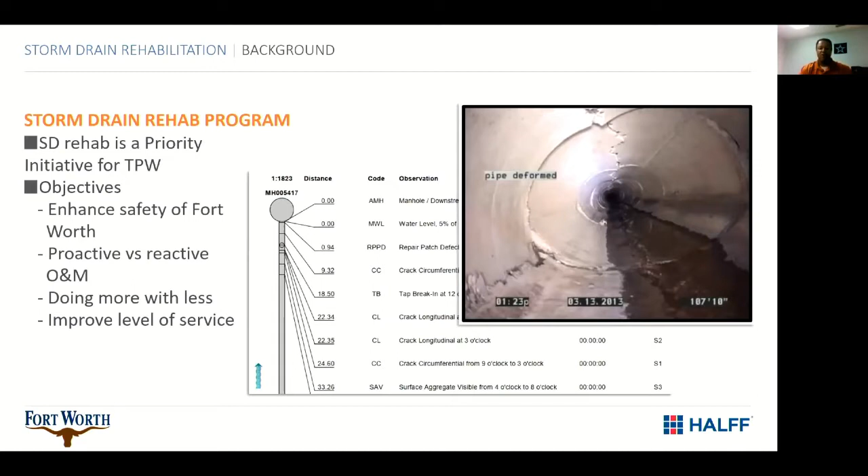A fundamental and ongoing task that is integral to the storm drain rehabilitation program has been to develop the framework. Some key considerations of the framework are the level of service and key performance indicators, which include targets for system operations, providing service during storm events of varying magnitude, repair turnaround time, and maintenance schedules and goals, as well as specific program tasks, along with manpower and staffing assignments.

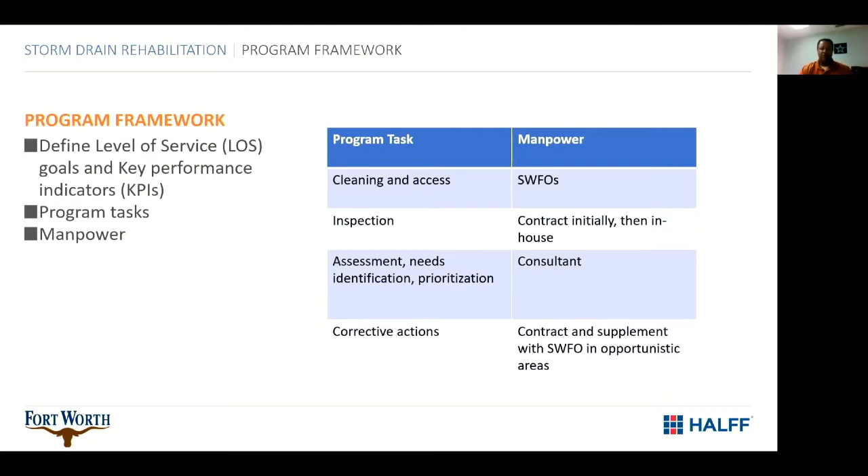So here's our framework: on the CCTV or the storm drain rehab program, our cleaning access, our stormwater field ops handles that. Inspection is currently being handled by contract, but it's soon to be transitioned to in-house. Assessments, needs that are identified, and prioritization are handled by consultants. Corrective actions are done by contract, and also by our field operations. The important first step is to address the known issues.

In our initial storm drain assessment, initial project prioritization ranked 16 known projects using basic consequence of failure criteria, which are proximity to structures, pipe size, and easement status. Easement status is an important factor for constructability, and we work with a realtor professional to perform easement research and verification.

Probability of failure refines prioritization with existing CCTV inspection data. Staff knowledge workshops discuss and document institutional knowledge about system maintenance, rehab, failure, and priority areas.

Now at this time, I would like to transition over to Matt, who will dive into what has transpired with the program.

Okay, thanks, Cannon. My name is Matt Stahl, and I'm a project manager with Halff Associates in our Fort Worth office. Over the past 22 months, Halff has partnered with Fort Worth Transportation and Public Works Department to develop and implement the storm drain rehabilitation program for proactive storm drain renewal.

So let's dig into how we are assessing storm drain condition with a standardized, repeatable method that allows us to gather high quality data to first track asset condition and second to contribute to risk prioritization.

So this is the condition assessment process that we have used during year one of the program. It starts off with the criticality and consequence of failure evaluation for that initial priority that Cannon just covered.

The next step was to prepare for CCTV. This involves some pre-CCTV inspections, securing access to storm drains where there were issues, and collecting the data associated with that. Then comes the CCTV data collection itself, along with QC and processing.

We then use the CCTV along with the consequence of failure for prioritization and evaluation of corrective actions. We then move into performing those corrective actions, which can include anything from cleaning to point repairs, rehabilitation, replacement, and even monitoring.

We then update the storm drain databases that are involved in this cycle and repeat the cycle, typically on an annual basis, to work towards that goal of proactive system maintenance and renewal.

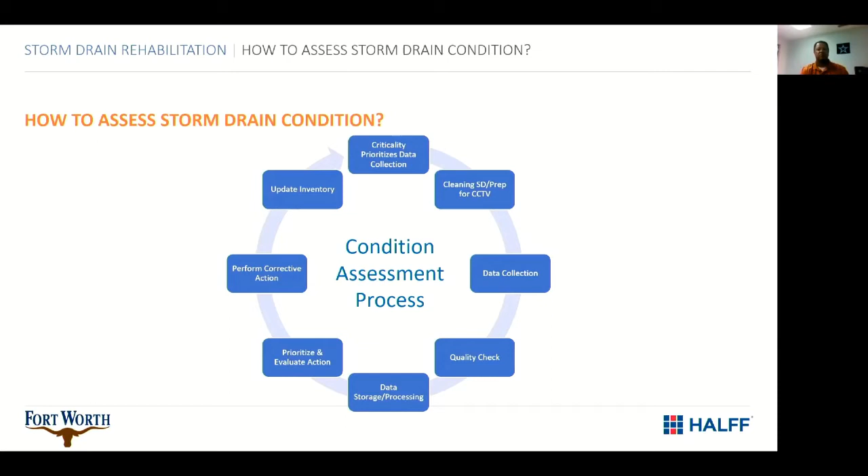So to dig into the program a little bit more in the inspection approach, for CCTV inspections of the storm drains, we're performing those on a mapshed basis to work towards that goal of proactive CCTV.

As Cannon mentioned, that is initially on a contract basis, but the city does want to implement that skill set through its field operations group to have that capability in-house.

We are conducting the inspections on a manhole-to-manhole basis as opposed to by pipe segment. However, every single storm drain in the system does end up with a condition score and a risk score.

The scoring approach itself, we're using NASSCO's PACP system. So we're keeping that pretty standard on the front end, but then post-processing takes place on the back end during QC to score only the defects that are relevant to storm drains.

As far as some big picture goals, we're aiming to inspect between 25 and 50 miles of the system per year. We want to work towards that goal of proactive and strategic inspection and maintenance management.

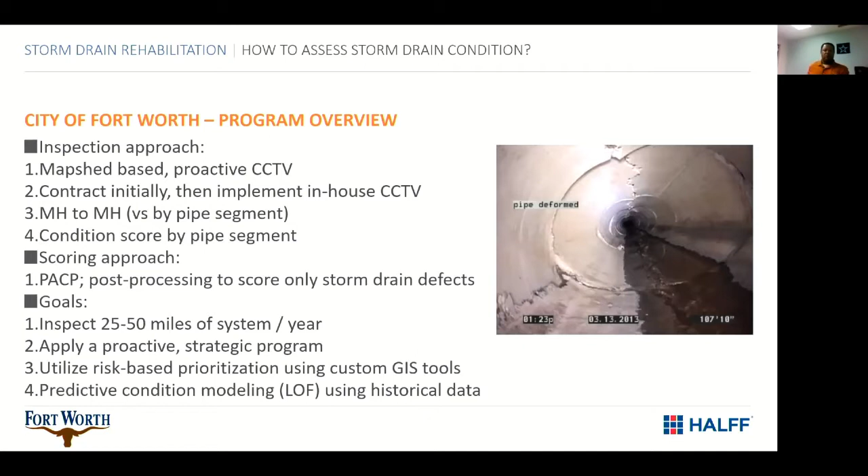We're utilizing a risk-based prioritization system and implementing that with custom GIS tools. And lastly, we're working towards being able to perform predictive condition modeling of the likelihood of failure by using historical data patterns. We'll talk more about that here in a few slides.

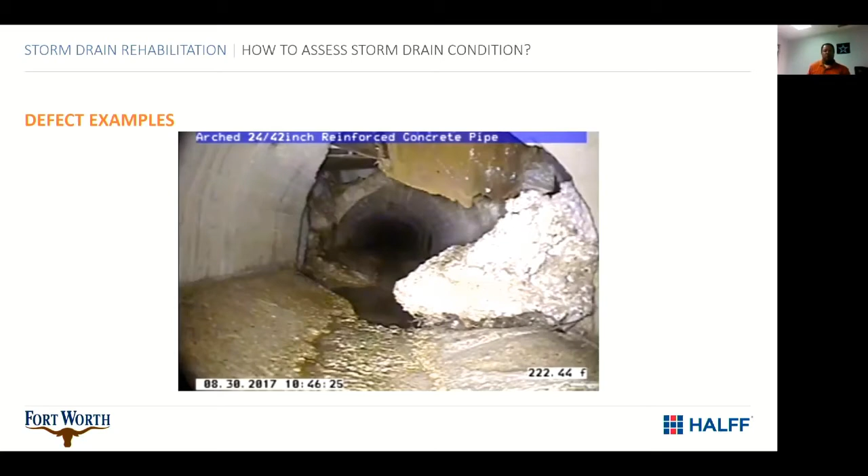Another example is this wall collapse. This is an arch pipe over in the Arlington Heights neighborhood, and a pretty severe wall collapse here. Again, a point repair would need to be performed here before one of the trenchless methods of lining or spray on or other trenchless rehab could be applied.

This example shows some pipe deformation. The degree of deformation is an important consideration when we're looking at trenchless methods. Typically, manufacturers don't recommend using the trenchless methods if there's more than about 10% deformation. And even if there's not quite that much, we really evaluate these carefully.

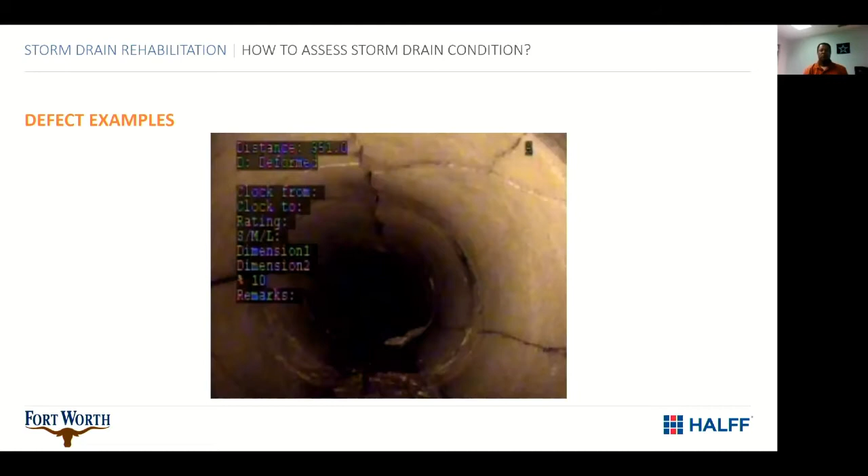This is another consideration, something we're looking at. Another offset joint seen here. This example shows some of the loss of embedment that was a likely contributor to this joint failure.

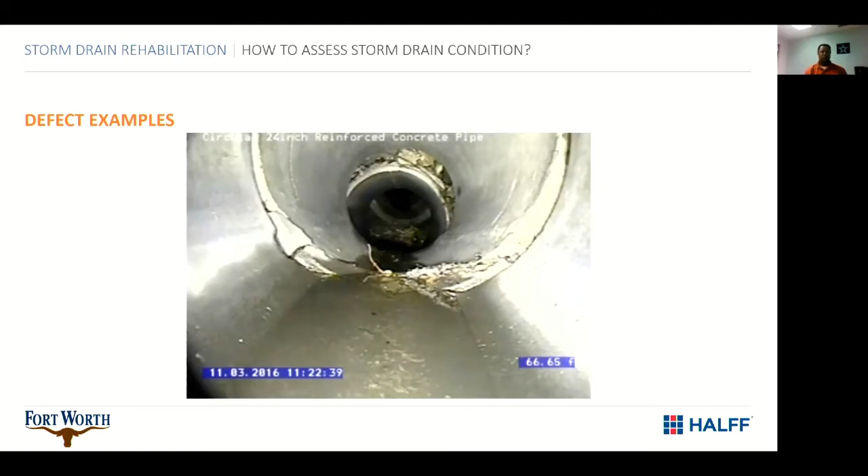And last example, more on the O&M side, we see a blockage here that would need to be cleared and cleaned to enable the proper functioning of the system.

As far as our scoring approach, the city is looking to build in this skill set, being able to perform its own CCTV inspections. For that, they're looking to purchase equipment appropriate for storm drains, things like high clearance crawlers, cables that have armoring, just for all the crazy things you can find out in the storm drains.

The scoring system itself is PACP based. Using that, we've developed a standardized pipe condition score that's applied to every pipe that gets inspected. With that score, we're using the NASSCO algorithm to convert from the condition score to likelihood of failure, following that approved method and converting the actual condition score to a 10 scale so that it's compatible with the risk-based scoring the city is using.

Just to show you a few of the deliverables we're providing for capital projects. On the left, we have a summary of site defects. This is a nice snapshot on one page of defects, considerations, any risks observed at the site, as well as rehabilitation method recommendations - the methods appropriate for each site, as well as those that might not be appropriate for different reasons. There's also a planning level cost estimate provided there.

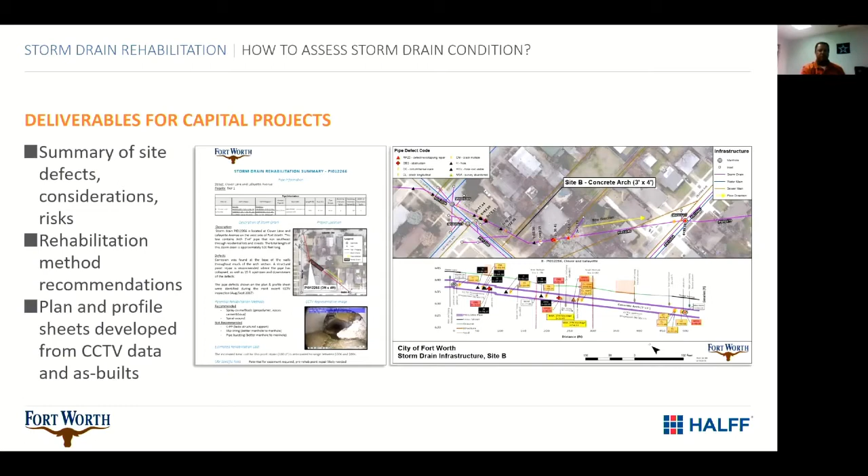Another data deliverable we're preparing is shown here - this is a web map service. Basically what we're doing is leveraging the Stormwater Development Services viewer, an existing viewer already in use by Transportation and Public Works for drainage reviews and other purposes. So we're using that and we're able to add to that existing service map services.

These allow us to provide data in an up-to-date format with secure data access. Most of these layers range from CCTV to pipe recommendations, corrective actions, different inspection routes - a whole variety of data products. Most of those are read-only, for reference, for evaluating the projects going forward.

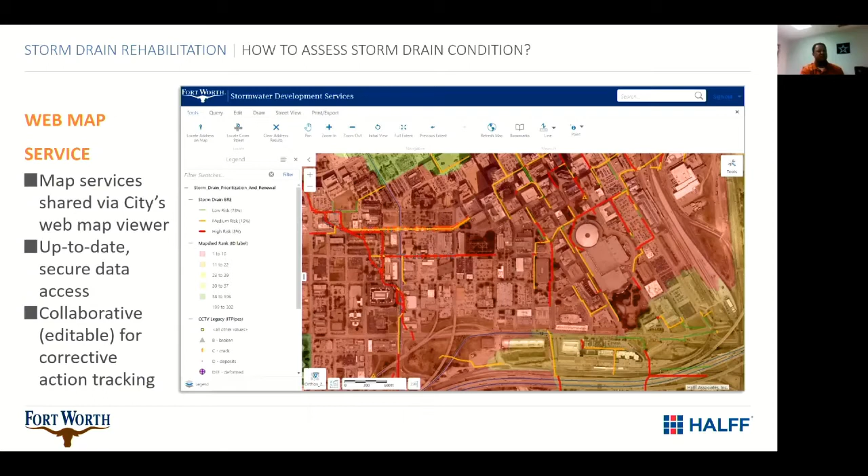But right at this time, we're actually implementing a collaborative layer, which is the recommendations for corrective action. We're really excited about this - it's going to allow us to improve the collaboration between the city groups participating in building the storm drain rehabilitation program.

So our next task is to prioritize the storm drains for rehab, replacement, monitoring. Let's talk about how the city of Fort Worth is doing this.

Within an established program framework, a business risk exposure approach allows us to combine the condition scores we're collecting through CCTV along with consequence of failure scoring to prioritize storm drains for corrective action. The city's software framework includes ITpipes, Excella as the work order system, and the Esri suite of products, along with some customized ArcGIS toolboxes.

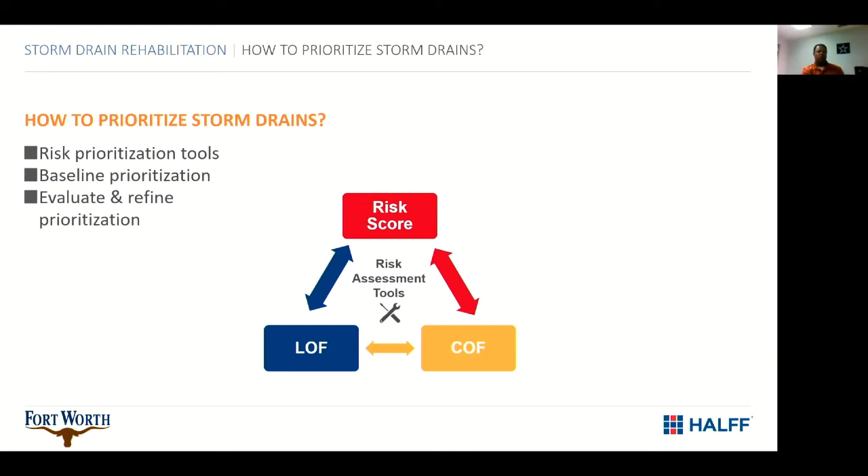So basically what that process looks like as we apply the risk criteria: the first step is to use the surrogate probability of failure information, so for pipes that have not been inspected, to make an estimate of that probability or likelihood of failure. We evaluate those results, performing things like the correlation analysis shown here on the slide, just to make sure those criteria are being applied as intended and that those results make sense.

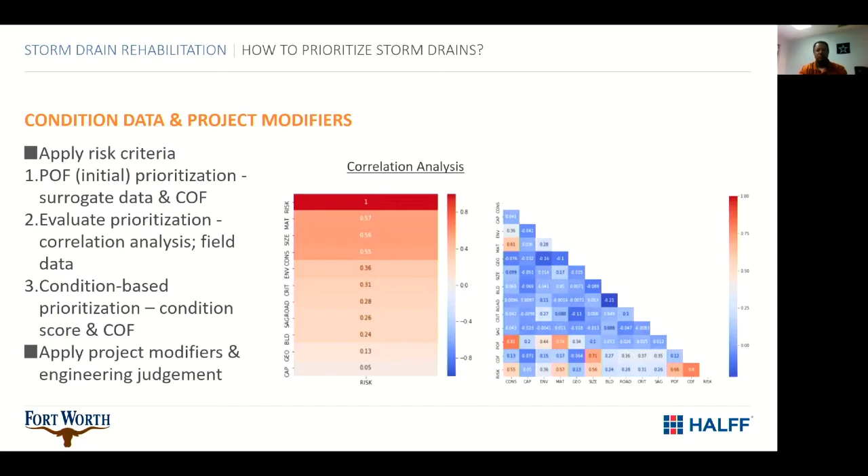The second prioritization is using the condition information, so using that CCTV and the standardized scoring, we take the results from that prioritization, apply different project modifiers and engineering judgment to come out with the final prioritization.

I'd like to perform a quick demonstration here to show you what this GIS-based prioritization looks like in action. It's a nice little tool that really lets us quickly evaluate and reprioritize storm drains as needed.

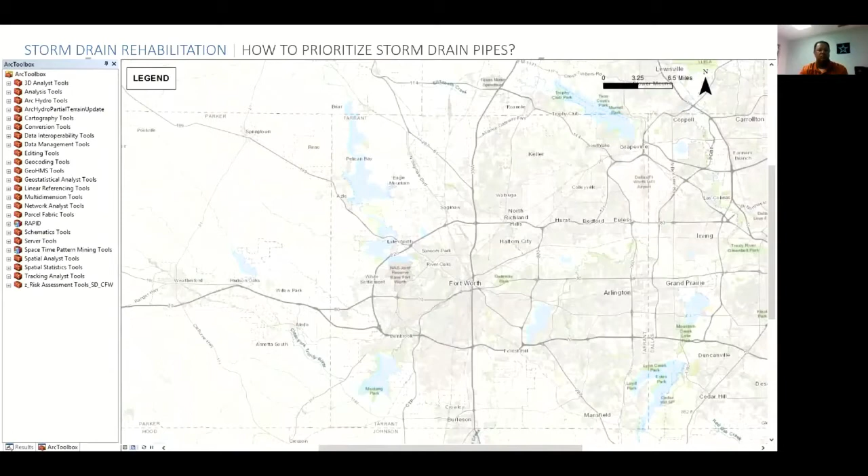So here we are in the GIS environment. We see the storm drains there in blue showing up on the map. Over on the left, we have the ARC toolbox, and at the bottom you can see the custom ArcGIS toolbox that's added to this project. This lets us look at the probability and consequence of failure as well as the risk score and rank.

You see there's basically a tool for each of the risk criteria that we saw on the table a couple slides back. We're going to apply those risk criteria to everything we know about the system, all the attributes that are shown here for the storm drains.

You can see that we have added some standardized fields, one for each of those risk criteria. Those are going to roll together over here at the probability and consequence of failure and allow us to establish those along with the risk score and rank.

We'll look at one example here today: this is the capacity score. This tool gives us access to all the layers that we have in ArcGIS, and basically what we're doing here is taking a pre-established capacity grade that compares the capacity of the pipe with the runoff to that pipe.

So the tool is running here, and it's very quickly going through, evaluating all of these 51,000 pipes that we have in the data set. We've scored for this particular criteria, the capacity score, where the pipes with an F get that higher score, and pipes with an A get a lower score.

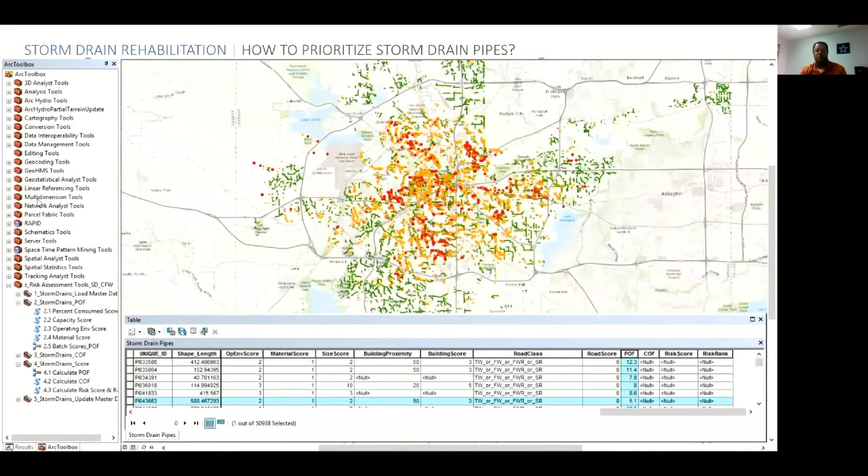So we'll pull that up just to show you the weights that are completely editable, that can be refined and changed as needed, and those all of course add up to 100%. So this is very much a transparent process - it's not a black box. We like it because we can really see what's driving the results based on the data.

So here we see those results in the map view, with red being the highest risk for probability of failure. You can zoom in and look at any of the data that's driving this and producing our scores.

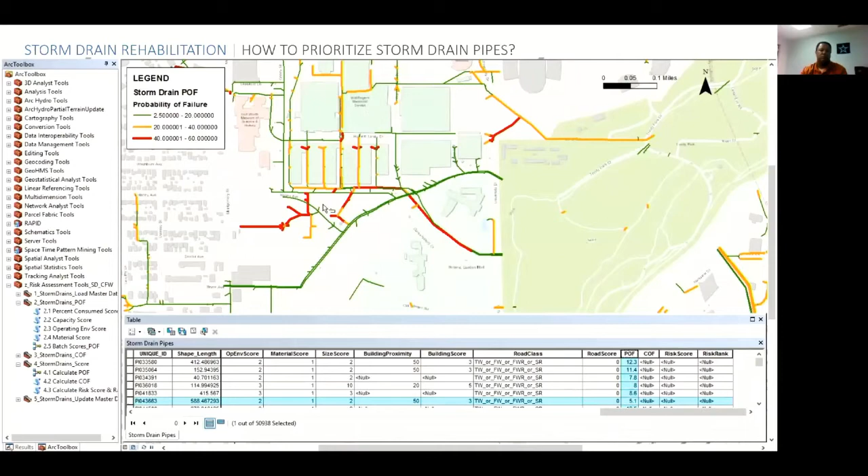To move on, the last task in our cycle here is to select and implement the appropriate corrective action. As part of the storm drain rehabilitation program, we like to prepare two types of deliverables.

First are these near-term deliverables that have more actionable near-term information. Typically these would be on a 10-year type planning cycle, such as the first table at the top, which is a 10-year condition assessment schedule. Now this is based on our risk results, and it's organized by Mapsco. This is the way that for the City of Fort Worth, we're conducting these inspections and proceeding through the system.

Another example of a near-term planning tool is this utility conflict prioritization table. We're seeing lots more of these utility conflicts these days, so it's important to keep track of them.

The second type of deliverable are these longer-term deliverables. We like to prepare tools such as this 50-year look at rehabilitation costs. We find this is helpful for the city to be able to aid budget projections and to more effectively communicate the needs of the program to stakeholders and to city council.

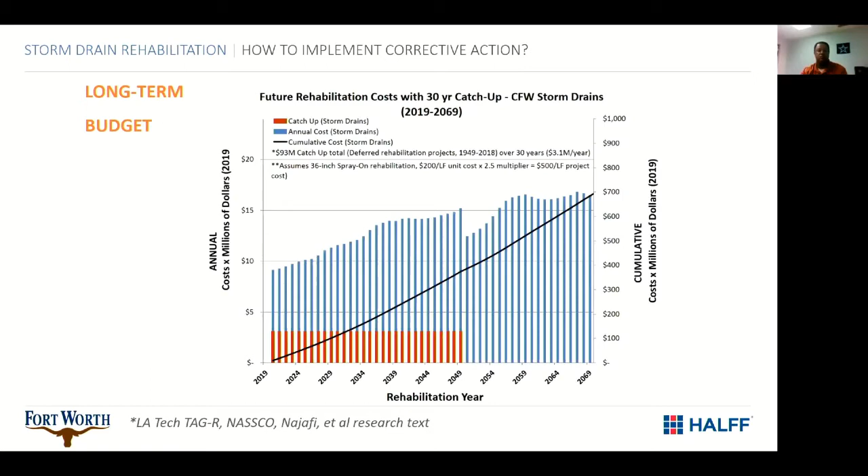As part of corrective action selection, we've helped the city put together a best value bidder package and selection process. That got started last summer, and early in fiscal year 20, the first four projects, I believe, went out for bid and were awarded, so those are in progress right now.

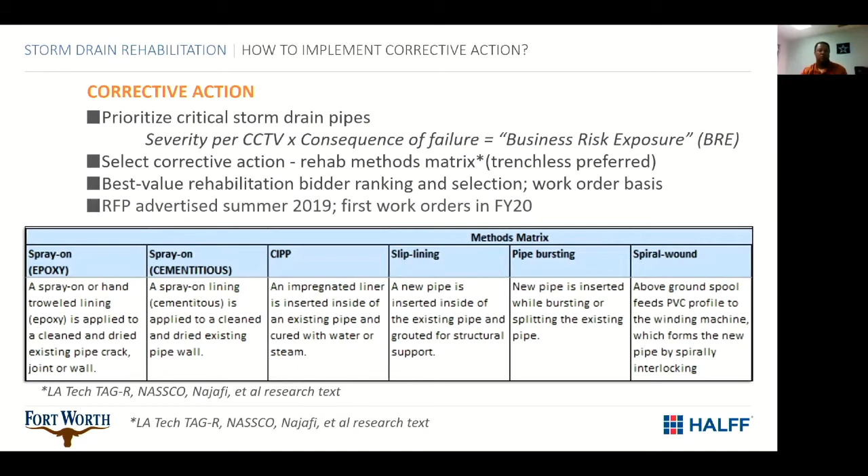To wrap up, after 22 months of partnering with the city to develop and implement the storm drain rehabilitation program, we've learned a few things. Shown here is one of the older arch pipes under downtown. Despite its age, being one of the oldest pipes in the system, it's remarkably well preserved. So, the age is really only one of many factors that drive storm drain maintenance and renewal.

A few more lessons learned. Number one, strategic planning: approaching this type of program with a cycle, a framework, with established workflows that can be standardized and repeated, really contributes to the success of the program. Number two, being in tune with stakeholder priorities and goals, working together with stakeholders as partners in the program, is also a key to success.

Number three, measuring success. As part of the program, we've worked with the city to define level of service goals that make sense, and then develop key performance indicators to help us measure progress towards those goals.

Number four, getting started with the information and data you have, condition data and other data, is also a real key. Nobody has information that's 100% accurate about their whole system, or condition data about the whole system, or even close to it. So getting started with the information you have as a subset, as a sample, allows the program to gather momentum and start progressing.

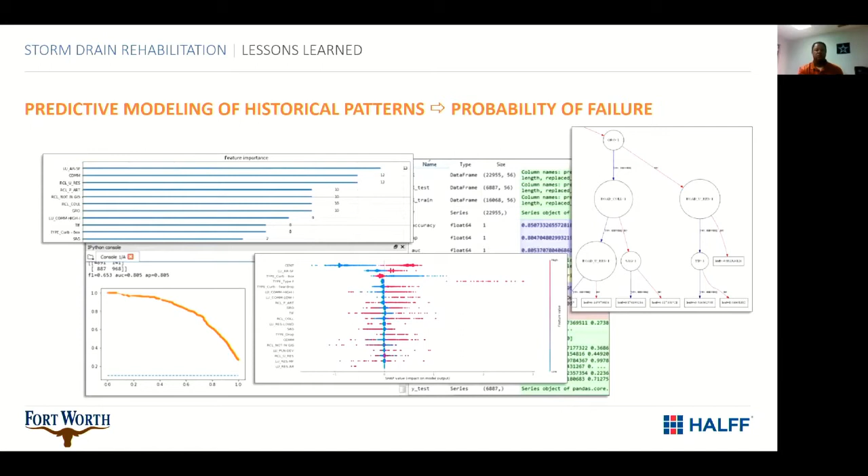And lastly, number five, collecting the right data today for data-driven decisions tomorrow. By collecting and building the right data set today, we're enabling some powerful analyses in the future—things like predictive modeling of the probability and likelihood of failure using historical trends of where and when the system has failed. Moving forward, a robust storm drain data set will help the city catch failure before it happens using methods like this.

So with that, we're really excited about the Fort Worth Storm Drain Rehabilitation Program's growth. We're looking forward to strategic advancement of the program through the rest of year one and beyond. Cannon and I thank you for joining us today, and with that, we can take any questions you might have.

Okay, we're back live, and we've got Cannon and Matt here to answer your questions. Let's go to the first question: could you talk about the process of securing funding necessary to pursue this approach? How did you position storm drain rehab as a priority relative to other funding priorities?

One of the things we've noticed, again with our master plan, is that a strategic focus has been for us to maintain more of our infrastructure. We started off doing a lot of large projects; however, we noticed that a lot of the money we need to maintain our infrastructure needed to go to things such as CCTV, vegetation maintenance, inlet cleaning, things of that nature. So with the storm drain rehab, we took a good stab—I'd say we initially earmarked close to about $500,000 for the program itself.

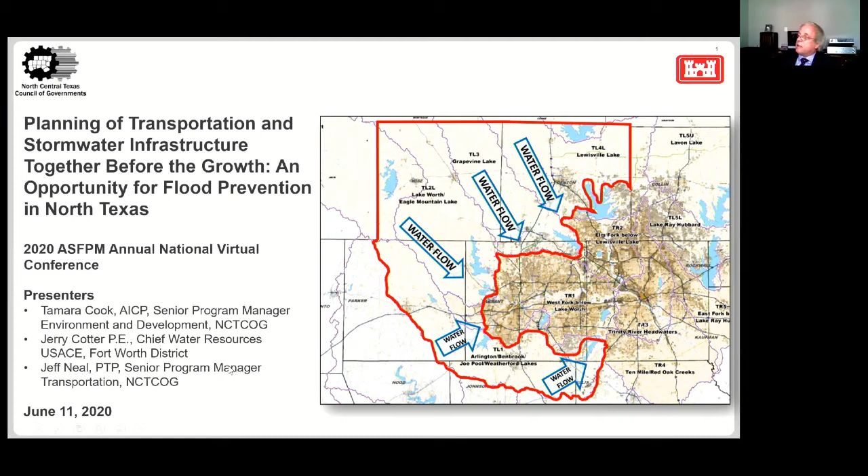Flooding disasters are impactful. Flooding has impacted tremendous portions of the United States. We're seeing an increasing frequency and magnitude of events. In fact, in the last 5 years, Texas has experienced 160 fatalities. We are also seeing increasing costs associated with these flooding events, and since 2015, Texas has experienced over $150 billion in flooding damages. Nationally, our expenditures on flooding have gone from about $1 billion a year to $8 billion a year.

The next slide shows the regional observed storms. The concept I'm trying to present here is that we're experiencing storms in our region that are exceeding our infrastructure design levels. That black line you see is the 24-hour rainfall for which we're designing infrastructure and setting our FIRMs here in this region. We did bring in NOAA Atlas 14 in 2018, which did increase the limits in parts of the state, but not in the Dallas-Fort Worth area. So you can see we're experiencing storms that greatly exceed what we're designing our infrastructure for. Next slide.

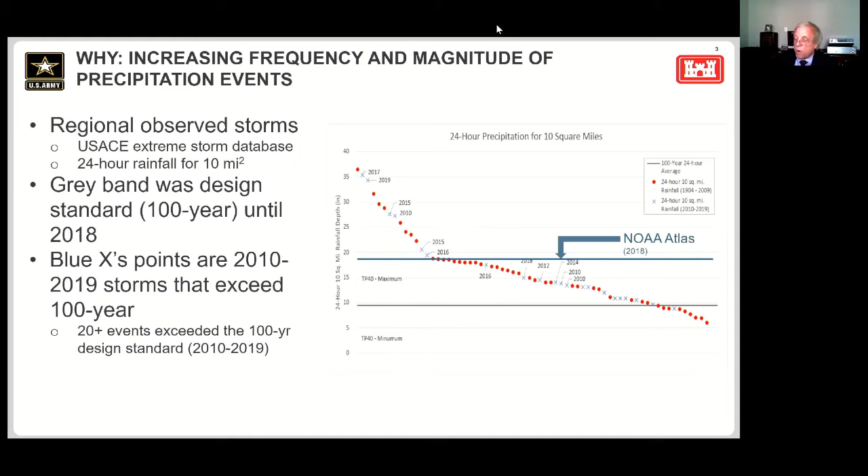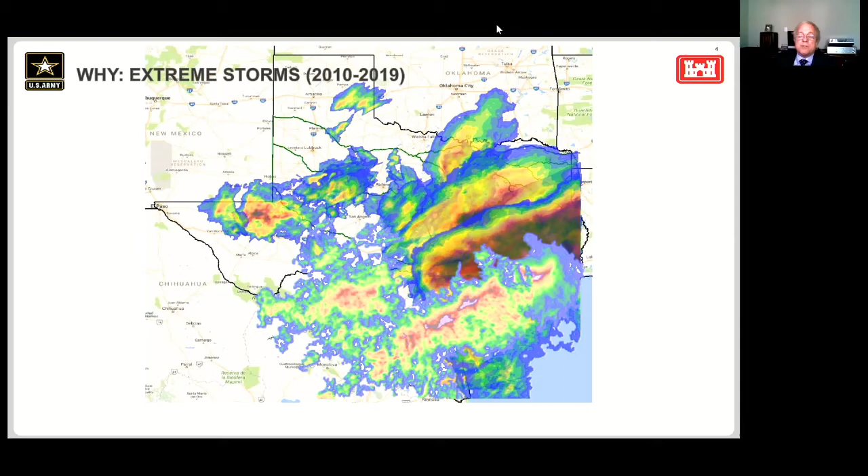This is simply a movie of the storms that are exceeding our infrastructure design levels for the period 2010 till now. So you can see if you live along the I-35 corridor or east, you are very likely to get one of these larger events that exceeds the infrastructure design levels we are currently utilizing here in Texas.

Next slide. So we're going to bring some new technologies to the table, and one of those is the ability to shift storms around. In addition to our standard hydrologic loading of looking at the 100-year, the 500-year, the various frequencies you commonly see in the FEMA program, we're also going to look at storms that have actually hit the Dallas-Fort Worth area or very close by, and we're going to shift and use that as an alternative loading.

So when we plan the stormwater infrastructure for that undeveloped portion of the Dallas-Fort Worth area, focusing on prevention rather than response, we're going to look at this alternative loading of taking some of these storms that have hit very close to or in the Dallas-Fort Worth area and loading the hydrology models with that. We're going to use a technology the Corps created called MetVue.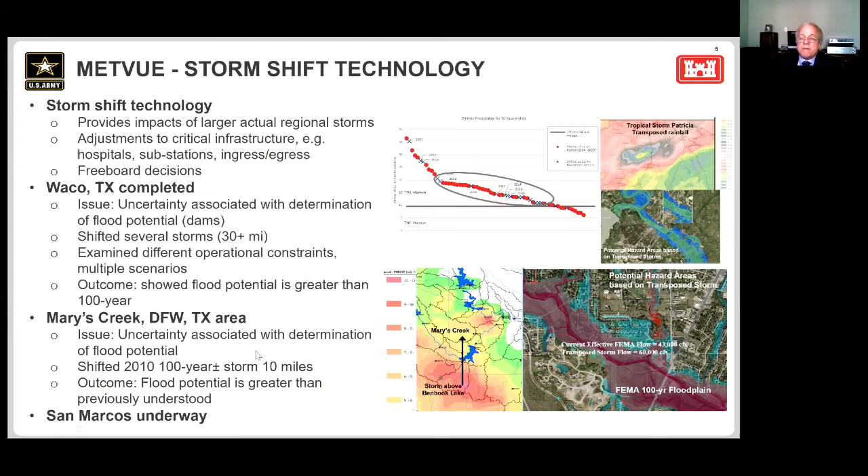Next slide. We also know that adding impervious cover and depleting valley storage are huge impacts. We have techniques to examine the loss of valley storage and the impacts of impervious cover, and we'll be using that with these techniques to look at what those impacts will be. Part of this will be providing information to communities that we need to preserve valley storage, and set up stormwater infrastructure — detention ponds — to offset the impacts of increased impervious cover. But I want to stress, we're not just looking to offset the loss of valley storage and increased impervious cover, but also we're going to look at these larger storms.

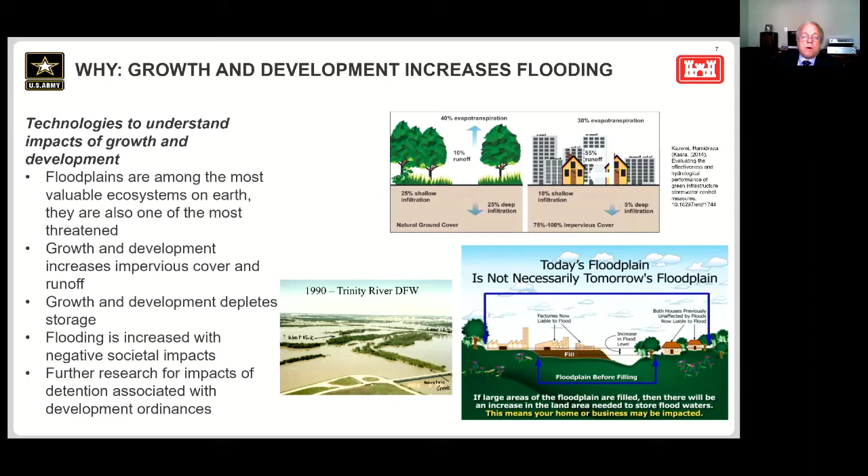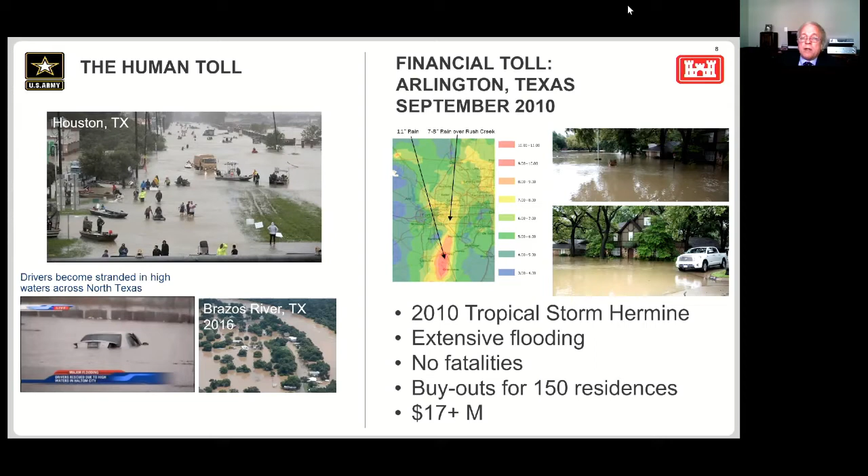I think when you begin to look at this issue and those pictures that were included in the previous slide, it's certainly no coincidence that you find flooding occurring along areas where there were or are roadways. We see in many cases when you're looking at urban developments all over this country, all over the world, it's usually transportation infrastructure and stormwater infrastructure that precedes a lot of the urban growth and development that we see.

But as you also saw in previous slides, those facilities are built based off of the identified 100-year or lower, depending on your regulations. It depends on the flood level identified at the particular time that that facility is built. In many cases, it's built with the idea that the surrounding landscape is going to have the same land use or similar land use as what exists at the time that that roadway is built.

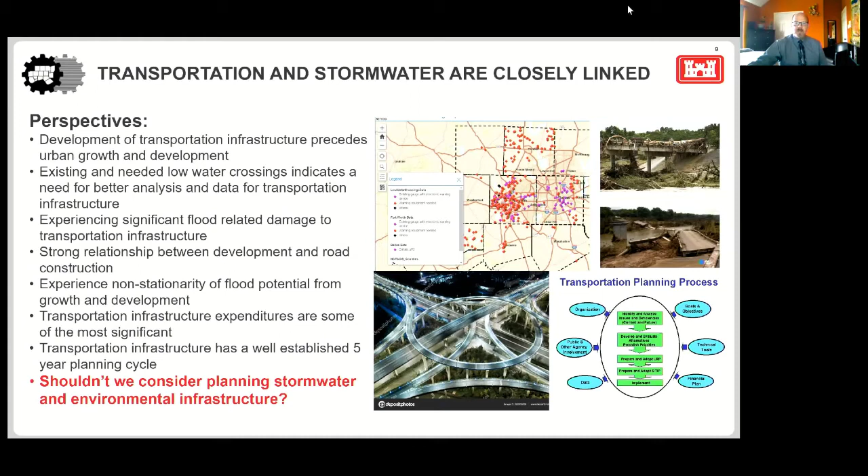We know in many cases roads that were built 30, 40, 50 years ago are handling travel demands, are handling many other loads, and a lot of it has to do with the fact that cities have developed all around them. With a metropolitan area growing as fast as the Dallas-Fort Worth area has, along with many other metropolitan regions in the country, this shows that we have to consider more of an integrated approach when looking at planning for transportation and stormwater infrastructure together.

If you'll go to the next slide, we're already in a process right now through our current surface transportation bill, called the Fixing America's Surface Transportation Act, moving more to a performance-based realm of transportation planning. The idea is that we want to set coordinated targets with our local, state, and federal partners on the condition of our facilities, whether it be safety or pavement and bridge.

For this particular project, pavement and bridge condition are extremely important because we want to understand how conditions, especially given the lack of consistent financial resources, may be affecting the attainment of specific targets. What are the risks associated with setting targets perhaps too high? We need to account for events like severe weather impacts and other things in order to understand how best to set performance targets out in the future, knowing that has a great impact on prioritizing certain projects, whether expansion-oriented or maintenance-oriented, to ensure we're meeting the objectives we're setting.

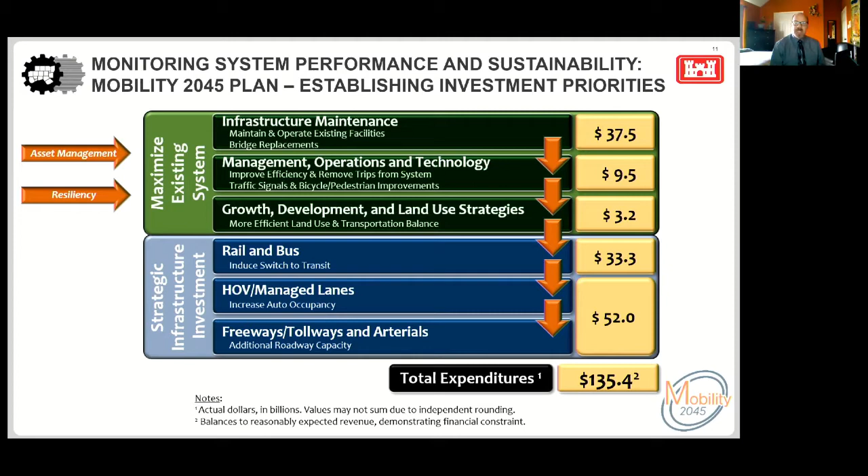Now, this becomes even more important when people realize that even when you're looking at the roadway system, it's very different from the perspective of what the locals are taking care of, what the federal government's taking care of, what the state is taking care of. Those performance measures I mentioned in a previous slide were primarily based off of what we call the national highway system.

Usually includes our interstate highway facilities and major state-owned roadways. But one of the interesting things about Texas, as well as states like California and other locations, is there are a significant amount of national highway system facilities that are not owned by the state. In fact, in the Dallas-Fort Worth area, our region has nearly half of those NHS facilities that are not owned by the state. So what does that mean?

It means that cities, counties, toll road authorities, in our case, the North Texas Tollway Authority, those entities also have to coordinate with state governments to make sure that we are addressing pavement and bridge condition across all of these facilities.

It becomes a great deal more important when you consider that although the national highway system in our area carries a vast majority of our traffic, it only comprises about 14% of the overall lane miles in the region. So we have to go further to understand the effects of flooding and other impacts, and what we have to do to maintain our system. We have to go talk with a great deal more people, more entities, to make sure that we are comprehensively addressing system needs. Next slide, please.

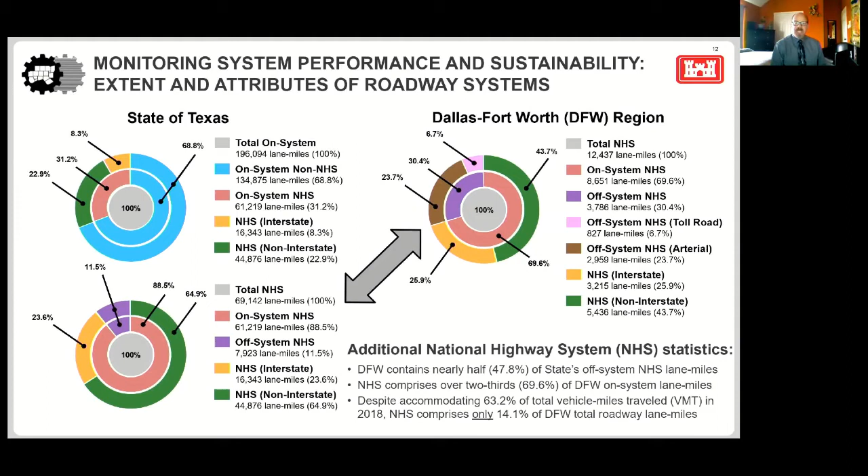So when you look at the top 10 cities in terms of population in the Dallas-Fort Worth region, beginning with the city of Dallas and down to the city of Mesquite, they are spending significant amounts of money in their capital improvement programs on their streets. And while much of it is indeed being used for preservation, of course, we are a region of 7.5 million people growing to over 11 million by 2045. Much of these funds are being used for expansion.

The problem is, from a maintenance and asset management standpoint, not all of those maintenance-oriented expenditures are tracked very well through the Metropolitan Planning Organization in most areas throughout the country. It also becomes difficult when you realize that as cities are converting their roadways to complete streets, for example having bike lanes or better active transportation elements or transit-oriented components, responsibilities for those assets begin to shift. So who then is going to be responsible for maintaining or expanding those facilities when the needs arise? It's important to make sure that we're tracking that and developing sufficient tools to ensure that when we're thinking about severe weather impacts and other impacts, we're able to distribute the load a great deal more effectively.

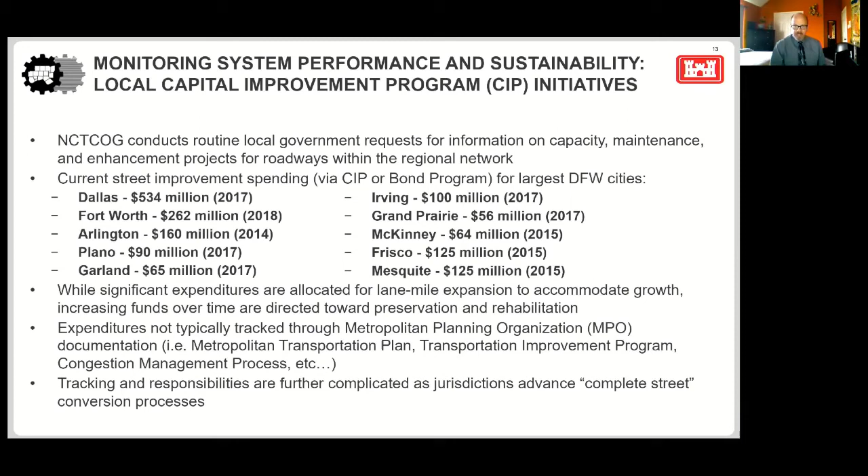Because as you can see, we're already realizing for those cities that are devoting a great deal more resources to asset management or tracking condition of their facilities over time, it's becoming more and more difficult to attain goals. You can see as you're looking at pavements for the city of Dallas, right now, despite spending over $500 million on streets, their current overall pavement condition rating is less than a goal that was set by the City Council back in 2006. The overall pavement condition will be less than what it is today, even after the $500 plus million are spent. In fact, both of these cities indicate that they would have to spend a great deal more than what they are spending now just to maintain their current pavement condition.

And this is extremely important when you realize that all of these facilities are greatly impacted, greatly burdened by increased travel demands, incidents, and severe weather events, because in many cases you see these assets deteriorating faster over time. It just demonstrates the need that more than ever, we need to find ways to integrate solutions that can help with stormwater, transportation, and environmental infrastructure as much as possible, so that we can take advantage of consolidating our resources to get resources together and solving multiple problems, hopefully, at the same time.

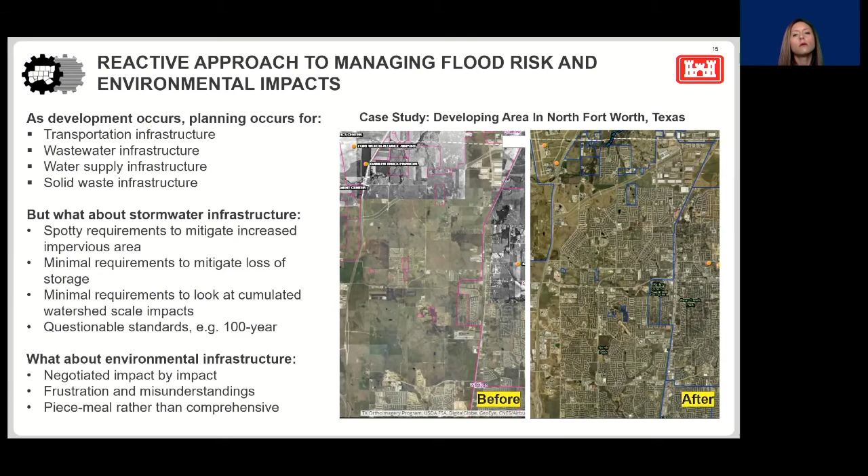So what are we hoping to do? It's really looking at the transportation planning element. There's long-standing transportation planning where every 5 years, from a regional perspective, we update the transportation plan. We want to integrate that with a regional approach to stormwater management planning in a specific region, the western portion of our North Texas area. Then, as a result of modeling and stormwater runoff calculations from future land uses, we want to look at opportunities to deploy environmental elements and features that provide value and economic benefit to the communities and the region, but also provide an ecosystem service.

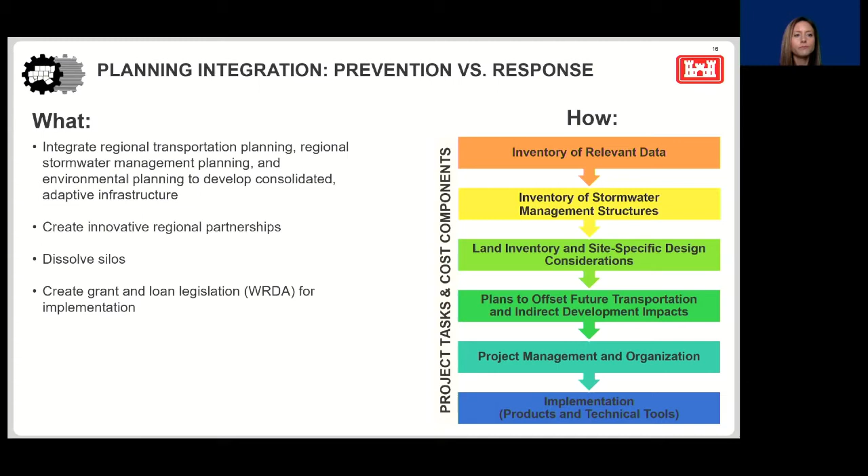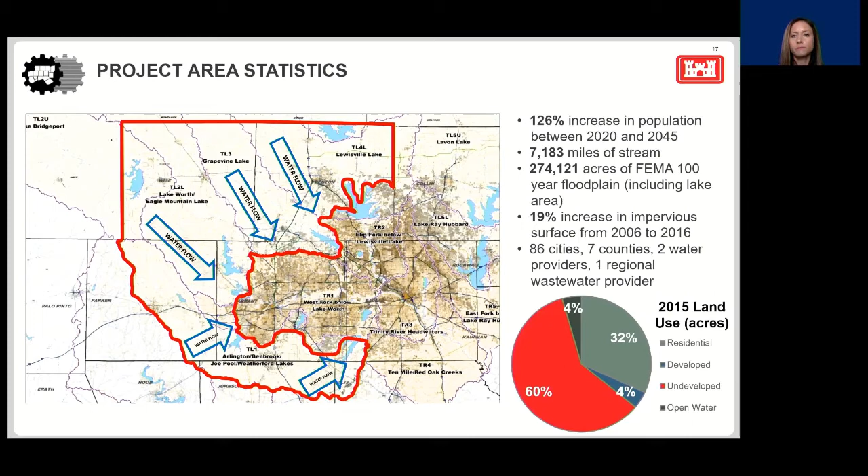There's a lot of benefits to looking at a more comprehensive planning approach like this, where we're looking not just at traditional gray transportation infrastructure, but truly at the impacts of all this growth from a stormwater perspective.

One really good benefit of this is dissolving the silos we typically all work within. Even within our own agency, today on the phone we have Jeff in transportation, and I'm a planner in environment and development, and we've been collaborating with Jerry from water and hydrology. It's brought a lot of different partners together that typically don't work on projects like this, and that's exciting because we come up with ideas we may not have had before. It also minimizes duplication and provides resources we can all feel confident about, helping our communities move forward with good decision making in terms of their growth.

It also complements existing regional programs that are longstanding, and complements the long-range transportation planning process that's been going on for a very long time. It creates positive financial outcomes.

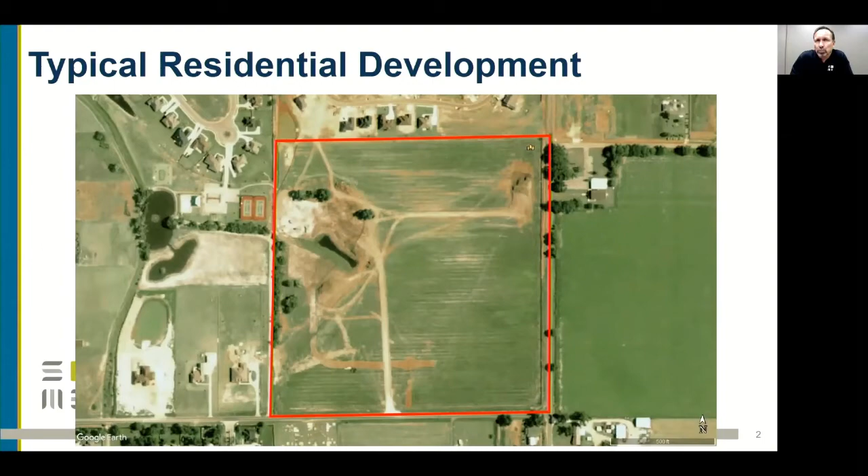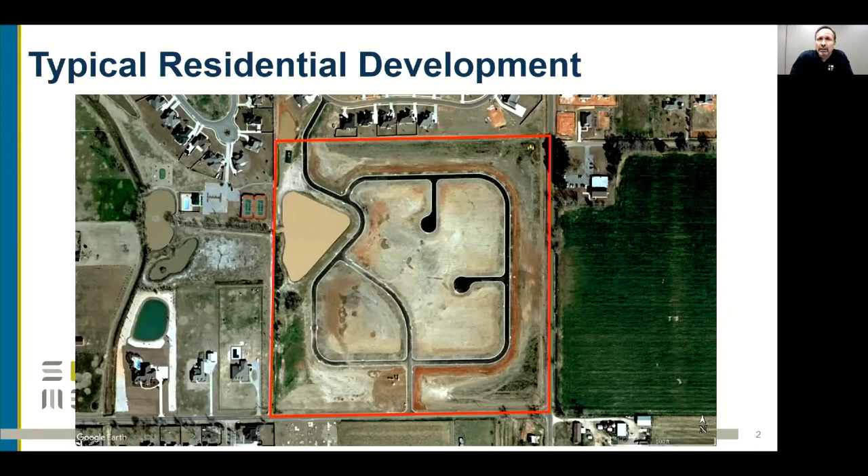My presentation is based on a legal case I've had some familiarity with, and it begins with the story of a proposed residential development. Typical development you might see anywhere, where we start with a vacant piece of property. We develop design plans, submit those for approval and permitting to the local community. Once approved, construction begins. One of the first things we do is lay in the infrastructure, including the drainage infrastructure, the stormwater control measures, which oftentimes serve as erosion control during construction. But eventually we get to a beautiful completed development, a beautiful place where people want to live.

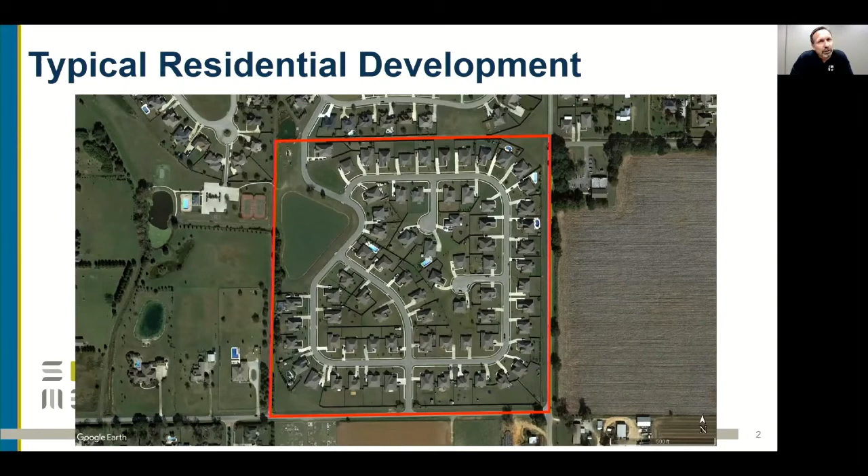This example takes place in an NFIP community, a community that's been involved in the NFIP since the early 70s, active in the community rating system, and has been as low as a CRS rating of 6. Floodplain management is no stranger here. One of the first questions asked in development is, do I need detention?

I'm going from a whole lot of nothing to a whole lot of something. I've got a relatively modest sized development at 38 acres. I'm going to go from a pasture field or an agricultural field to a medium density residential defined by local zoning. In the end, as it was designed, the average home lot is about 0.4 acres, so between a third of an acre and half an acre. Do I need detention? In most communities, you're going from nothing to something, so the answer is probably yes. And that was the case in this particular situation.

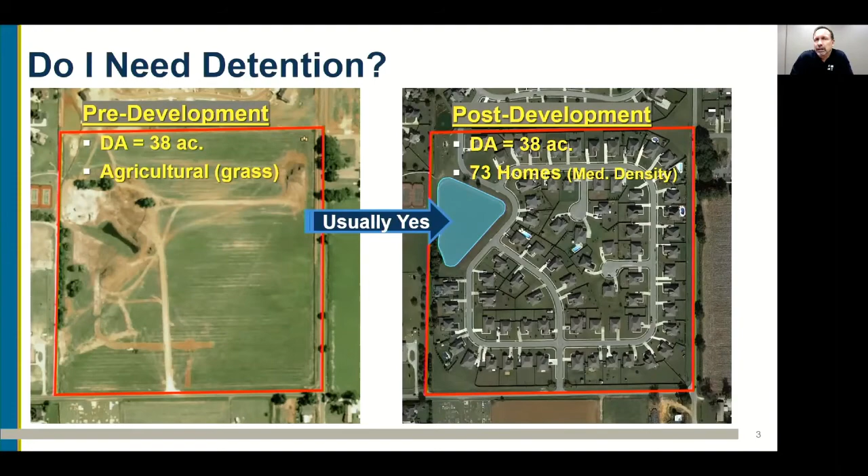What were the design standards? Well, design standards vary greatly depending on where you are. Just as an example, in Alabama, since that's where I'm located, design standards throughout the state vary wildly, but they tend to be a little on the low side. Most detention basin requirements are for a pre versus post from the 2-year event up through the 25.

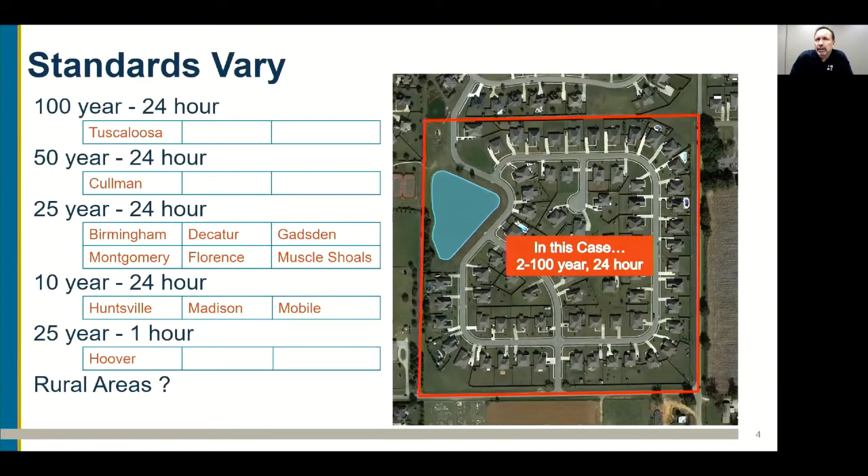If you go north of where I'm located into Middle Tennessee, let's say the greater Nashville area, detention standards get a lot higher. A lot of communities there have a 100-year design standard for a stormwater control measure, meaning you have to meet pre versus post from the 2-year event all the way up through the 100-year event. In this particular case, in Anywhere USA, the design standard was a 100-year standard.

Easy enough as a design professional, right? We have a certain development, we know what we want to build, we know what kind of storage volume we need. Easy engineering calculations, if you will. We do that as design professionals all day, every day in the site design process. In this particular case, they want a wet pond because they want that aesthetic feature on site, with some flood storage above the normal water level of the retention basin.

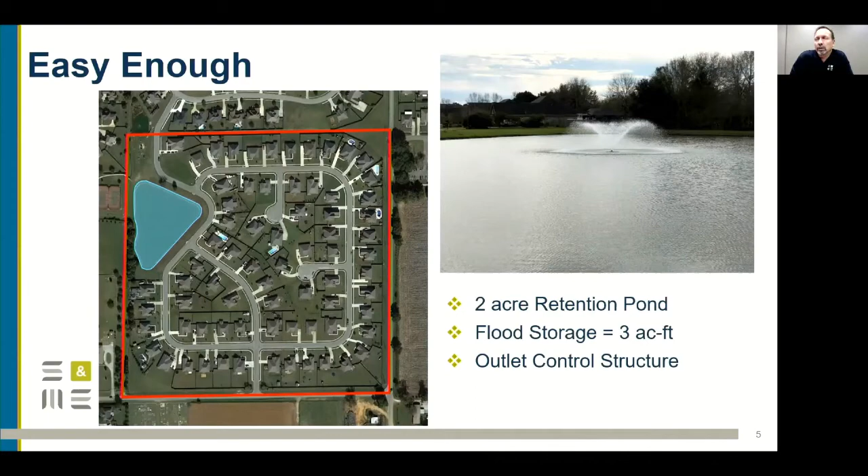All of that's controlled by some outlet structure, easily designed, easy part of a normal site design process. One of the things we often check is, will homes flood in and around our development? In this particular case, we have homes stipulated on the plat at 36.7 being the minimum first floor elevation, particularly for a handful of homes that are low-lying in the vicinity of the retention pond we're designing. We stipulate on the plat that those homes have to be at a certain elevation to limit the risk of flooding around our stormwater control measure.

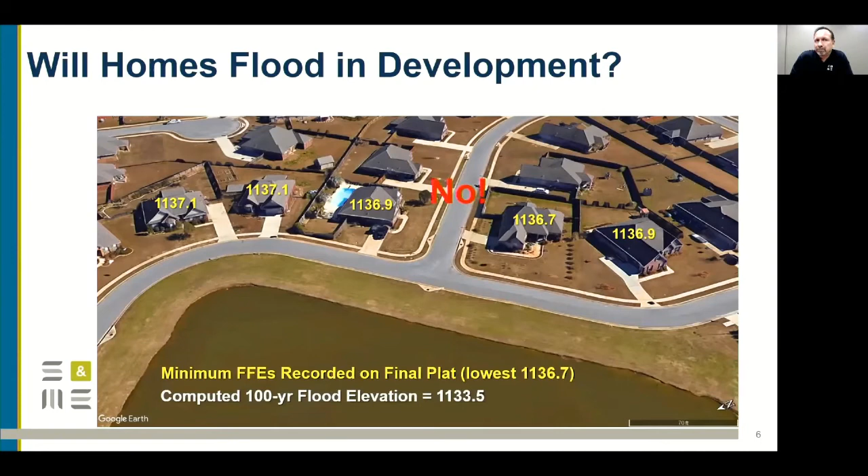So if the 100-year elevation for our pond is 33.5, and the minimum elevation for the homes is 36.7, then we've got 3 feet of freeboard. That almost certainly, in most communities, meets the standard for flood protection in this scenario. So should our homes flood in the development? Well, no, not based on what we know so far. They should not. But what if they do?

Following a given storm event, let's say some of those low-lying homes do get flooded. They may call the community official, they may complain, they may ask, hey, what can you do for us? But ultimately, if they don't have some resolution, they may pick up the phone and call an attorney.

Oftentimes, an attorney takes the case. That attorney may turn around to an engineer, let's say a forensic engineer, to say, hey, can you look at this situation and tell me if everything's on the up and up? Why did these people flood? Did perhaps something in the development process go wrong?

So that expert witness, for lack of a better term, might pick up a drainage report and the design plans and the plat and other associated documents that go with that development. If you look at the drainage report for this example, there's certainly a section that deals with the stormwater infrastructure in the subdivision. Normally not a concern in a flooding situation, but it is something to look at because it may clue you into other things that are going on.

In this case, the drainage report, or hydraulic report, or whatever your local community may call it, had no narrative about the situation. It went straight into summary tables and output from either spreadsheet calculations or design software. As is typically done, the stormwater infrastructure was based on the rational method.

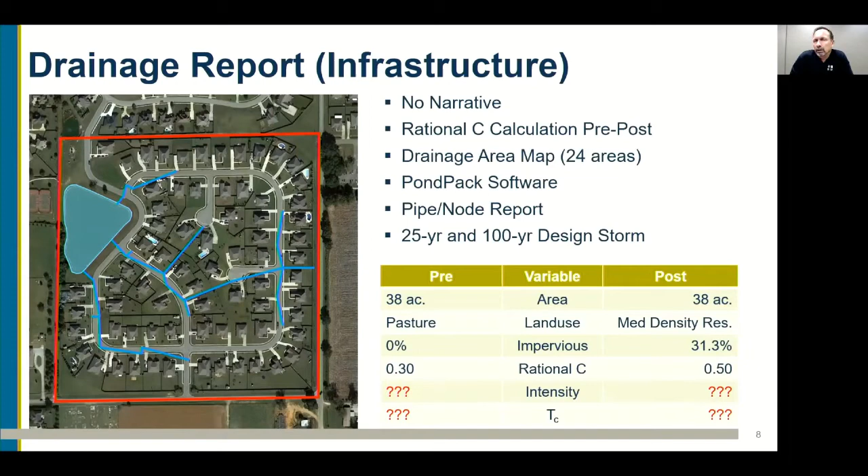So you turn the page and you look at the detention calculation side of the drainage report, and you see some similar things. There's no narrative to tell you how that was done. There are some calculations that came out of the software used.

PondPack, again, is an adequate piece of software for this particular purpose. I will say that regardless of the software you use, as a plans reviewer we need to make sure that everything included in the drainage report exports from those software packages includes all the input variables necessary for us to make some judgment about the output we're seeing.

In this particular case, the output from that software did indicate that the analysis was run for the 2 through 100, which met the standard. There was rainfall depth, duration, frequency values in the output. Great, we needed that. It did indicate that the SCS method was used in developing the hydrograph to route through the detention pond. Awesome. Be careful, because sometimes within this and other pieces of software, a rational method or a modified rational method may be used for detention design.

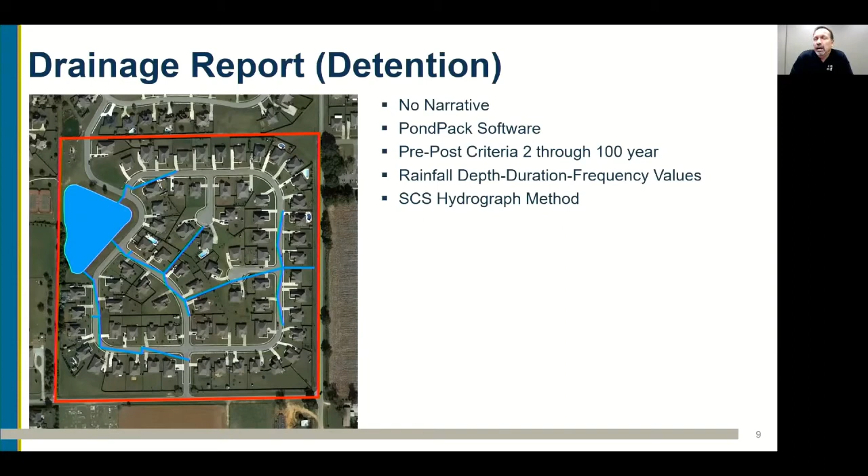And I would contend that unless your local standards explicitly say that's okay, the modified rational method should never be used for a stormwater control measure design or a detention or retention basin design. In this case, it wasn't. The hydrograph method, SCS method, was used.

We look at the variables that we can deduce from the summary tables and from the PondPack output, and we see once again that there's some information we just don't have available to us as a plans reviewer. The drainage report did not mention soils, which combined with land use and area gives us the information we need for a curve number and for development of a time of concentration, ultimately going into the SCS method to give us a calculation of the pre-development peak flow, the post-development peak flow, and the volume perhaps that we need to detain to meet a pre versus post requirement.

So again, missing information that really we need as plans reviewers to be able to adequately judge the reasonableness of a given proposed stormwater control measure.

So in this case, a summary table showed the pre-development discharge at 137 from the PondPack output, and a post-development discharge calculated at 143. Are those reasonable? Don't know. We don't have the backup information to be able to make a judgment on that one way or the other.

I will say, from a common sense standpoint, if I'm going from a whole lot of nothing to a whole lot of something, and my discharge only goes up 4%, that doesn't really feel right to me. So it might be worth digging a little deeper and asking for more information to back check those calculations.

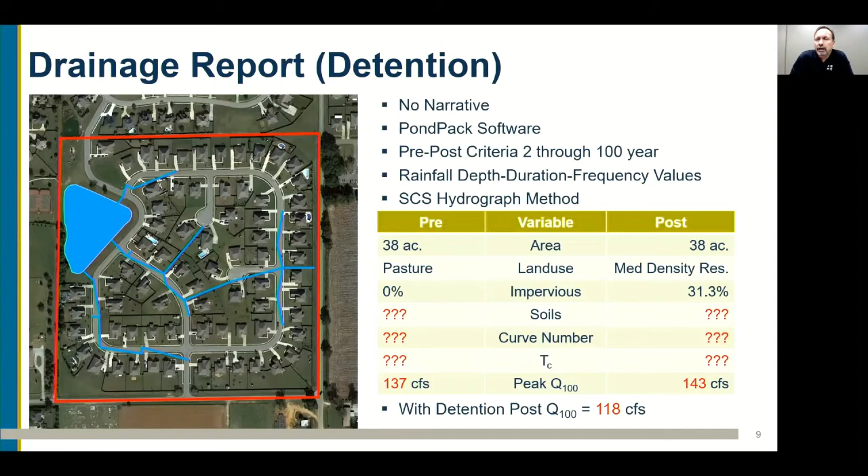The PondPack output did, as you would expect, present calculations and information pertaining to the post-development discharge, which ended up at 118. Since I don't have all the input variables I need to gauge the appropriateness of the calculation, I don't know if that's right or not, but it certainly at face value meets the standard: 137 pre, 118 post. I've met the pre versus post requirement all the way up to the 100. I'm just focusing this presentation on the 100.

So everything looks good. So what about the calculations of our stormwater control measure? In this particular case, the outlet of the retention pond was a weir, a two-stage weir. Weir number one was 13 feet wide at an elevation of 32.2, and 6 inches above that was the second stage of the weir at an elevation of 32.7. So a two-stage weir modeled in PondPack, which again is a perfectly adequate piece of software to make this type of calculation.

Now this particular designer did use PondPack, or maybe a version of PondPack, where the weir needed to be modeled not as a single complex structure but as two independent weirs. Not uncommon in various software packages. One may quickly notice, though, within the drainage report and the design plans, that the two-stage weir wasn't modeled appropriately or correctly. Weir number two, representing 6 feet of a ledge on the left and 6 feet of a ledge on the right, should have been a total of 12 feet in width, but in fact was the entire width of the structure, which means that the calculation of 133.5 as a flood elevation might not be appropriate, because part of that area was counted twice in the calculation of the conveyance through that weir.

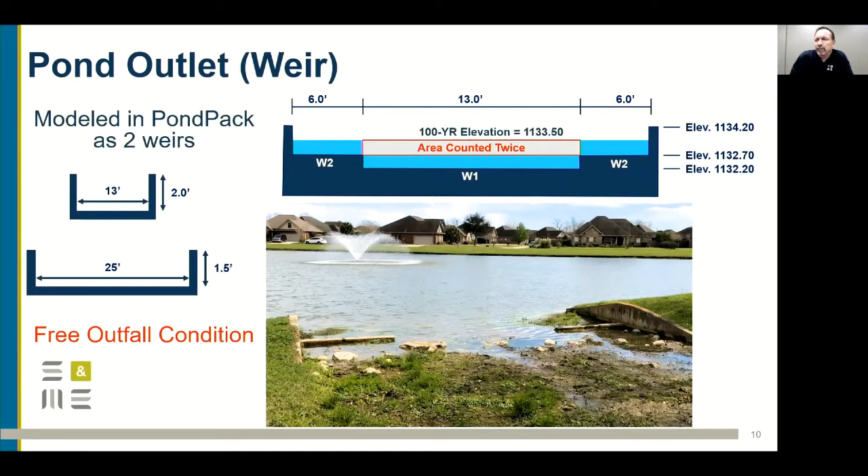Additionally, the performance of any given weir is based on the outfall. Is it submerged? Is it not? In this particular case, the outfall was modeled with a free outfall condition, meaning there is no tailwater condition whatsoever that would affect the hydraulic performance of that weir, or therefore the flood storage in the retention basin. We'll talk about that more in a minute, but you might get a feeling from the picture of this outfall structure, this weir, that free outfall condition might not be an appropriate assumption.

But other things we consider when we're designing, right? Is anything draining to me? Do I need to consider anything around my development passing through me, whether it goes through my detention pond or not? So everything to the west discharges downstream of me. Everything to the north goes around me to the downstream side. Everything to the south drains around me or away from me.

But there is a plot of land on the northeast side of my development, 35 acres, that's already in the development process as I'm designing my development. 35 acres that I acknowledge in my drainage report as being off-site, coming to me, but yet I do not consider that in the calculations of my stormwater infrastructure on site, nor on my stormwater control measure, my retention pond.

Also, though, to the east is another undeveloped piece of property, 25 acres, that drains toward me, that I also do not include in the calculations of my stormwater infrastructure nor my detention pond, but in fact I do acknowledge it's coming to me because I stub out my stormwater infrastructure to pick up both of these areas.

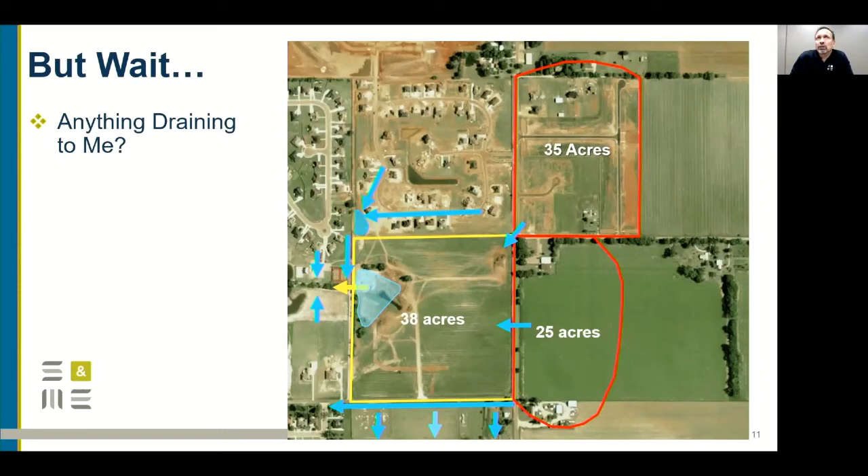So I am 38 acres. My offsite drainage coming into my development is 60 acres. And I acknowledge those in my drainage report, but I do not include those in my calculations. This should be a quick and easy red flag for any plans reviewer, whether that be inside the design firm or at the community level. What are the regulatory requirements in this case?

In this case, and I paraphrase, you have to consider that upstream area. You don't have to detain it, but you have to consider it in your design as if it were fully developed. So not just 35 plus 25, 60 acres of undeveloped property, but based on zoning, you have to assume that is in a developed condition, and you have to take that post-development discharge and route it through your development.

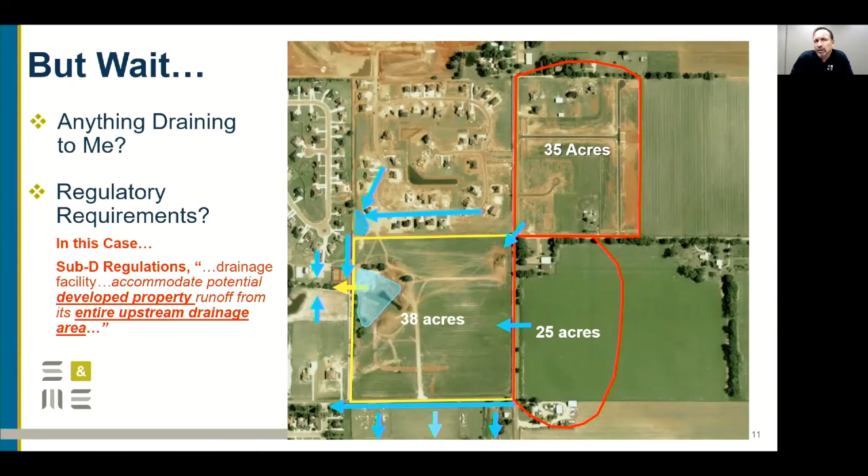What about downstream? Oftentimes we look, or are asked at the community level, does a particular development affect downstream flooding? Many different standards to meet, but typically in most communities there is a standard. You need to look downstream to make sure, even though you met pre-post at the boundary of your subdivision, what are the conditions offsite that you need to worry about? Are you going to flood somebody downstream or flood some other structure downstream based on hydrograph timing? In this particular case, there was no regulatory requirement in the local regulations.

What about tailwater conditions? We mentioned a second ago, the downstream side of that weir didn't look like the greatest condition to be discharging to. So what am I discharging to? Is there a tailwater condition that I should take into account that affects my design? In this case, again, from a regulatory standpoint, that standard was not called out.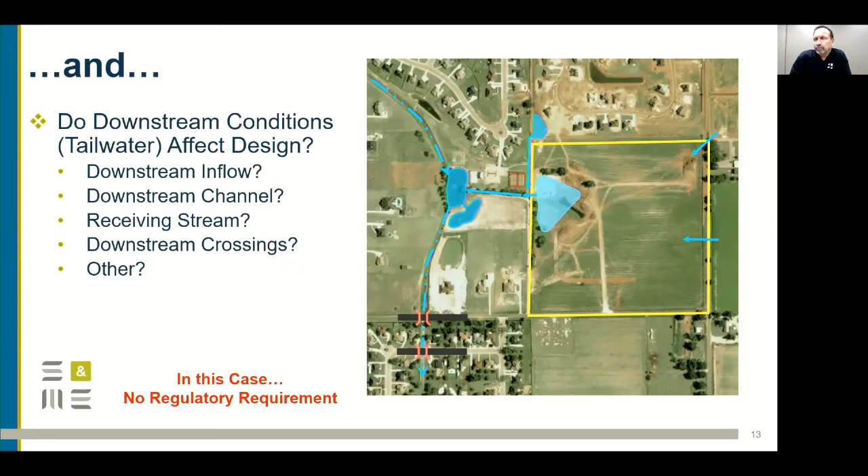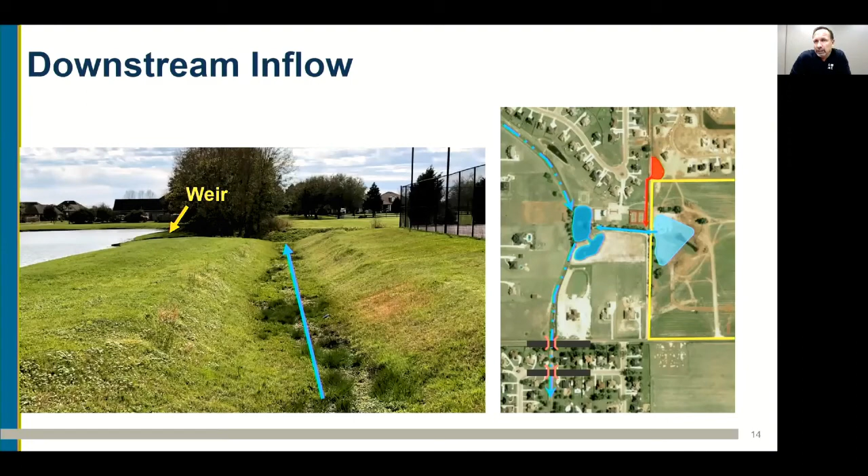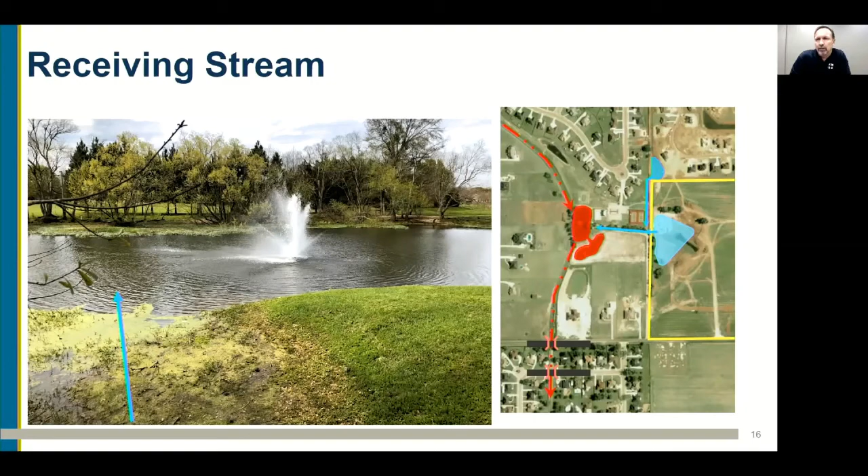So let's look and see what that is. There is a downstream channel that my development discharges to. Immediately downstream of my weir, there is offsite drainage that comes into that same channel. Those two combine to flow through a decent looking channel to go downstream to the ultimate receiving stream, which is a wet weather, perennial stream, that has its own inline retention basin because of past development in the area. A little further downstream, about 1,000 feet, we have a road crossing for the local community, as well as a subdivision road for the next downstream development. So a number of things downstream that probably should be considered in the design of my on-site stormwater control measures.

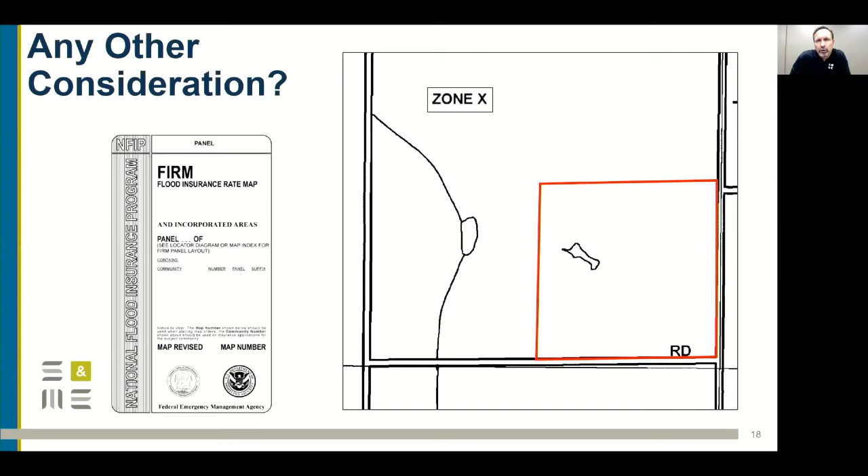One of the things we always look at is our floodplain. Regardless whether you pull the paper map or go to the online resources, you check and see in this case that no, you're not in a floodplain and you're not discharging to a floodplain. It's a zone X. Except that the design engineer knew better. The design engineer noted on their plans, and ultimately noted on their plat, which is a legal document filed with the court and the local community, that there is a flood height on that receiving stream, in this case of 1135.5.

So even though it's not on a FEMA FIRM map, there is a locally known and acknowledged flood elevation that both the community officials and the design engineers should be cognizant of when going through the development process.

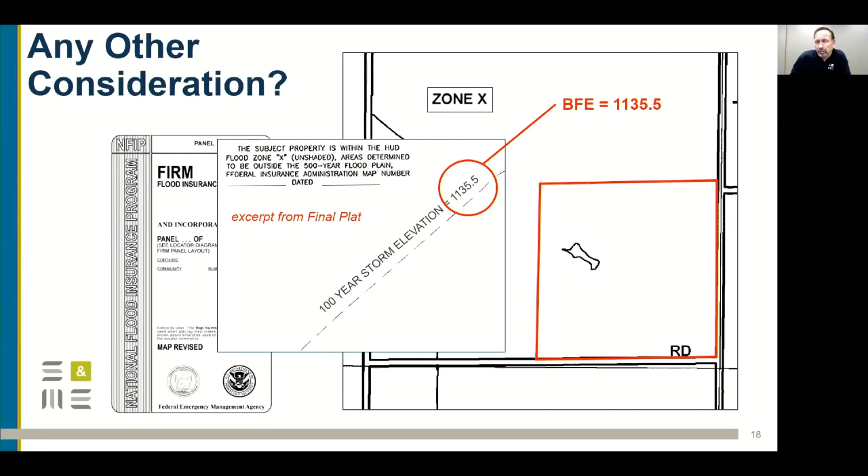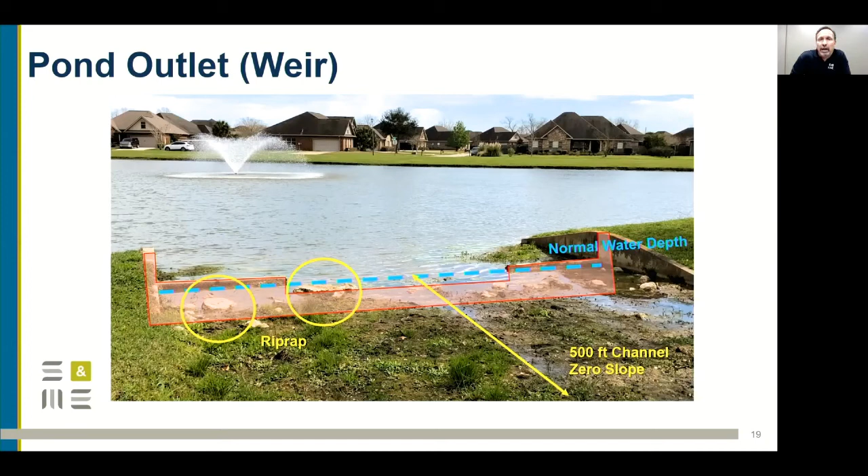So let's go back to our weir. It is a two-stage weir, as I mentioned. It has a normal water surface elevation that appears to be above the invert of the weir. It discharges to a 500-foot long channel that literally has zero slope to it. And in fact, there is riprap, probably for energy dissipation, located upstream, downstream, and in the throat of the weir. Not sure who put it there, don't have records for it, why it's there, but certainly impacts the hydraulic characteristics, the hydraulic calculations of the weir.

As a sidebar, who maintains a pond and its outlet control structure? Well, certainly there's a need to maintain the storage volume for flood control. Whether somebody maintains the wet pool for aesthetics is another story. But besides the storage volume, there is the outlet control structure that certainly needs to be maintained over time for proper function.

In this case, the regulatory standard is that the homeowners association is legally required to maintain that stormwater control measure. Where does a homeowners association get dragged into a lawsuit? Well, maybe because over a period of time, the outlet control structure looks more like a small forest than it does a concrete weir. So much buildup that vegetative growth, certainly at least at face value, would appear to obstruct the proper form and function of that stormwater control measure.

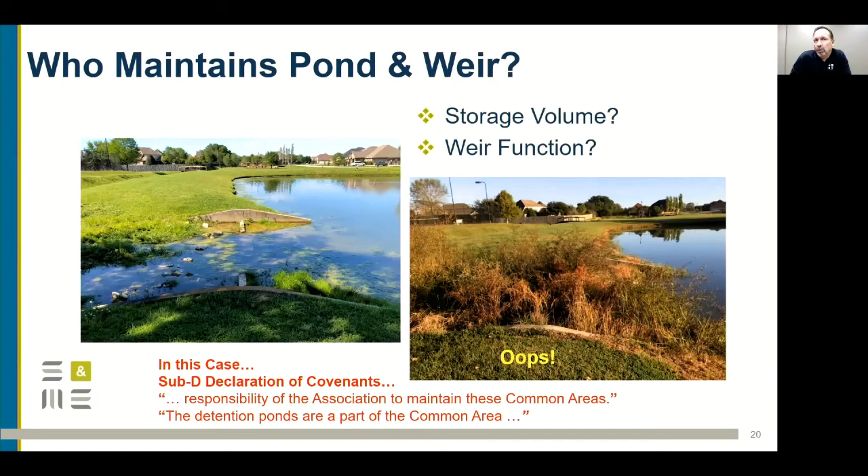So will homes flood in the development? Well, they did. And we take a look at the flood calculation for the pond at 33.5. By now you get the idea that maybe that's a flawed elevation for many different reasons. But we had 3 feet of anticipated freeboard for the homes around the pond. But the receiving stream had a much higher flood elevation.

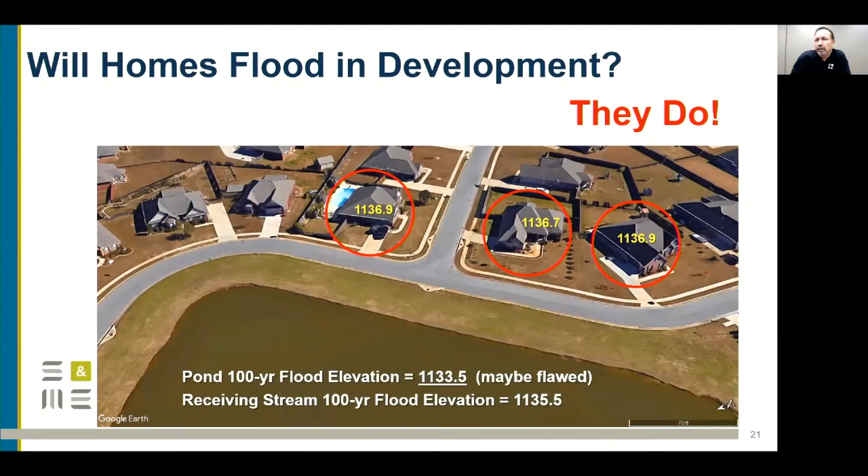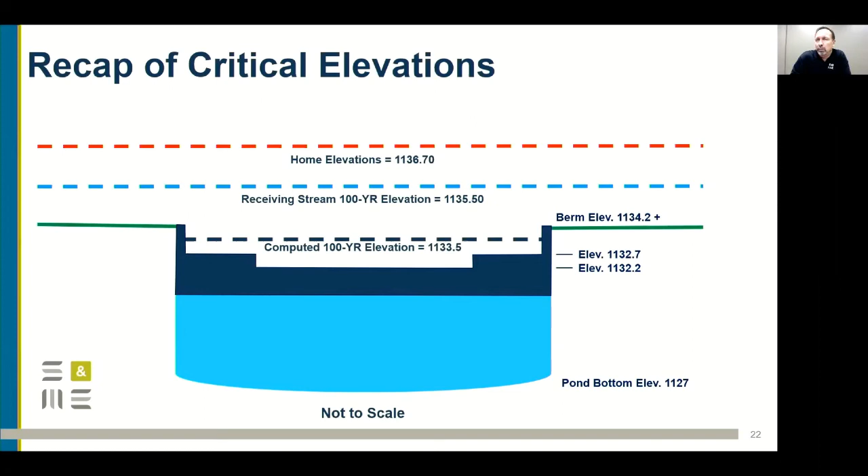So takeaways for the presentation. First and foremost, know the regulations if you're a designer, a site designer. In this case, the firm does a lot of site design and they knew the regulations and they generally follow the regulations. But one thing I think we forget as designers is that the regulations are a minimum requirement to get a permit from whoever the regulatory officials at either the local, state, or federal level.

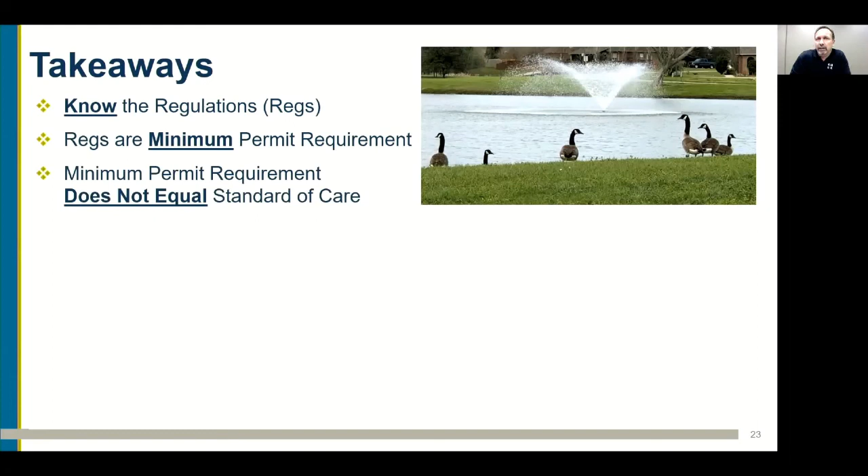Regulations do not equal the standard of care in our industry. They most certainly do not, just because you met a permit regulation does not mean that you have limited your liability very much at all, because if somebody is aggrieved, they can always hire an attorney, take you to court, and that's an expensive proposition.

Stormwater may drive a development and how the development is laid out, or should in this case. You can't always start with how many homes I want on how much piece of property, and then, oh, by the way, where do we put our pond and how big does it have to be? In this particular case, the stormwater should have controlled the development, not the development controlling the stormwater.

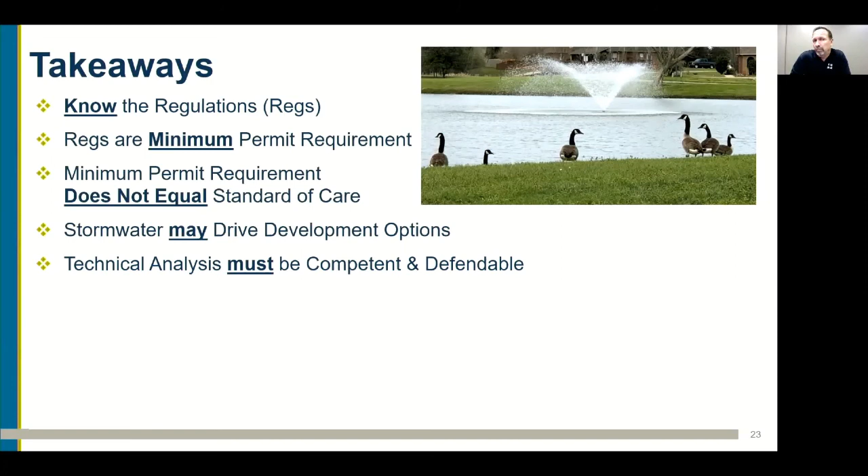The technical analysis must be competent, and defendable in a court of law, not just arguable to the local community that has to review the design plans and issue a permit. So, regardless of the competency of those engineering calculations, they should be reviewed thoroughly internally at the design firm before they go to the local community for permitting.

In this case, it would appear that there were a lot of omissions, maybe mistakes, maybe bad theory, maybe a bad approach, a lot of questions that should have been asked internally before the design plans and design report ever made it out of house to the local community. I believe in most cases, you have mid-level or young engineers doing hydraulic calculations and stormwater management design, and the people that should be doing the reviews don't set aside enough time or budget to do a thorough review and to mentor our younger professionals.

To make sure that what we turn into the regulatory community is worthy of our seal and worthy of our corporate name. Externally, certainly in this case, there were a lot of red flags and omissions in what was turned into the local community.

I think it's fair to say the local community could have done a better job performing plans review. It feels like in this particular case the community looked at the design plans, pre-post, the drainage report, and said, oh, these people checked all the boxes. I know Billy Joe Jim Bob, so to speak. He's a good engineer, his firm's good, so I'm just going to file that report away. Well, that's not due diligence on the part of the local community and the taxpayers we serve.

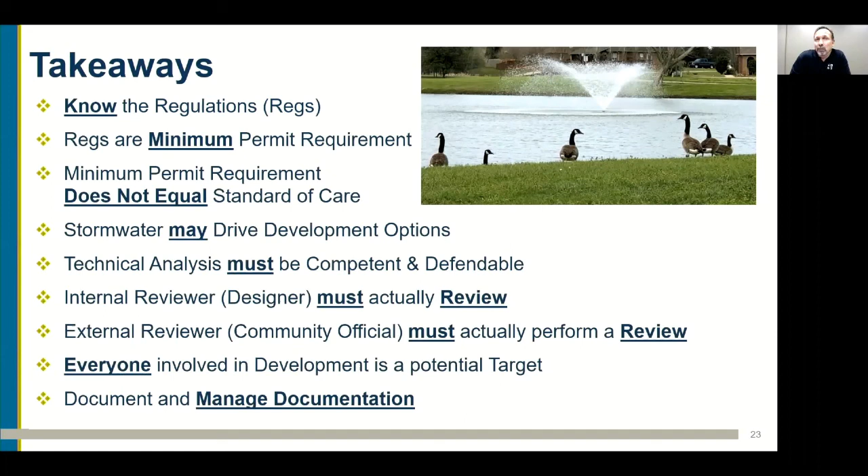So when it came time to give depositions or go to court, the design professional had no other resources to get documents with which to defend themselves. They no longer had any records in their own files they could use in their defense, which is really sad and unfortunate for the design professional. So I'll leave you with that lesson learned: always make sure we have backups of our designs, so we have historical information to go back to should we ever need it.

I hope no matter which side of the development process you're on, that you found something interesting or noteworthy to take away from the presentation. Thank you for your attendance and attention, and I'll be happy to answer any questions.